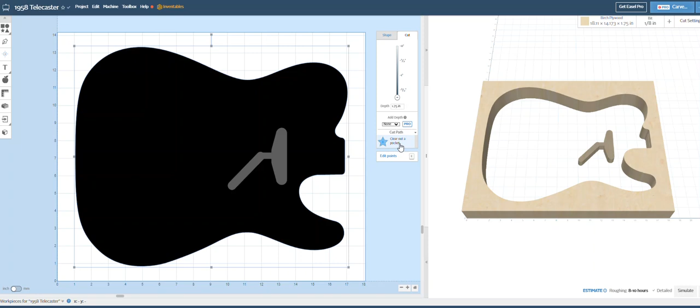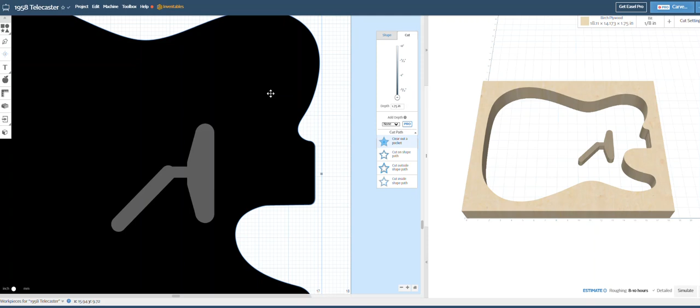So when you have the word cut here, you can see that there's a spot that says cut path, and right now it's on clear out pocket. So if you were to click this, there's a few different options to choose from, right? You have clear out pocket, which is going to clear out everything in between, right? You can see that's why this render over here shows the guitar body completely missing.

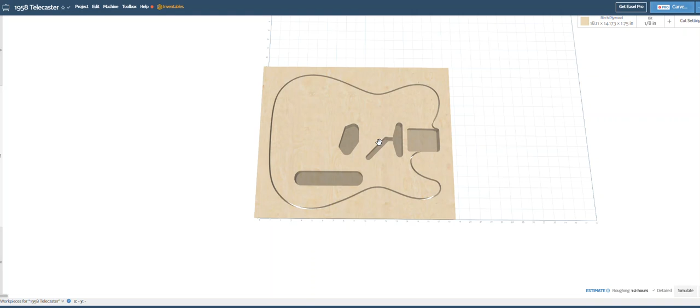Then there's cut on shape. So we're going to take a couple minutes here to talk about this cut on shape. So when I first cut this guitar body years ago, I did not pay attention when I went to cut it out, and I actually told it to cut out on the shape. Now, at the time, I was using a 1/4 inch bit.

So I want you to focus on this real quick so you can see that this looks okay, right? So to the eye, it looks normal. But what is actually happening here is when you tell it to cut on shape, the line that the shape of the guitar body is on will actually be right at the middle of the 1/4 inch bit. So that means that you're going to cut inward about an 1/8 inch and on the outer edge about an 1/8 inch, right? So there'll be a 1/4 inch groove that goes around.

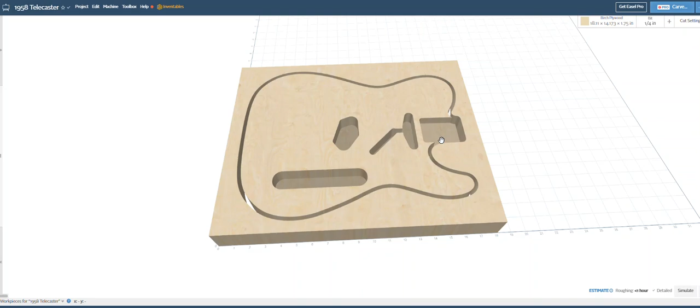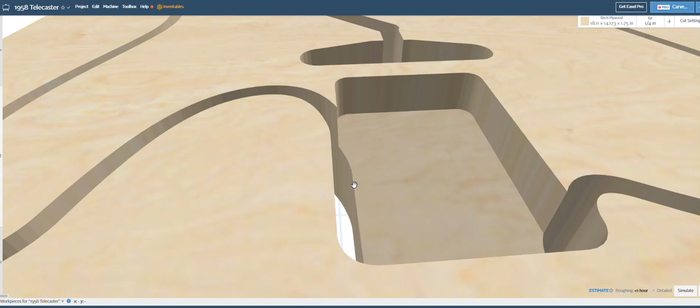But what you end up having, if we look at this pocket of the neck here, is an 1/8 of an inch inward. So when your neck comes in here, your neck's going to fit into here perfectly, right in this spot. But when you get to the cutout spot, so from here around to here, it's going to be wrong by an 1/8 of an inch. So your neck will hang over this edge an 1/8 of an inch. Still usable, but it's not going to be smooth to the finger.

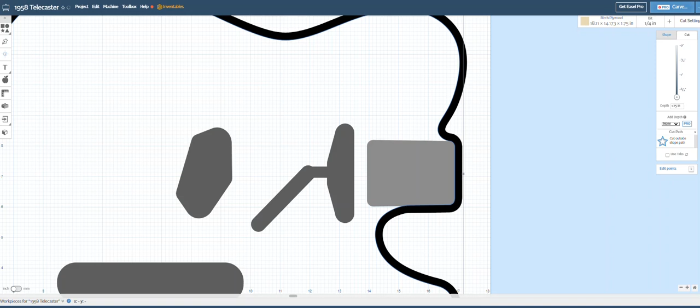So if we go back to this cut option and change it to cut outside of path, you'll notice this line right here is going to shift a little bit. See how that shifted? I'll do that again. We were on cut on shape. We're going to change it to cut outside of path. Let me see if I can get this dual screen for you here.

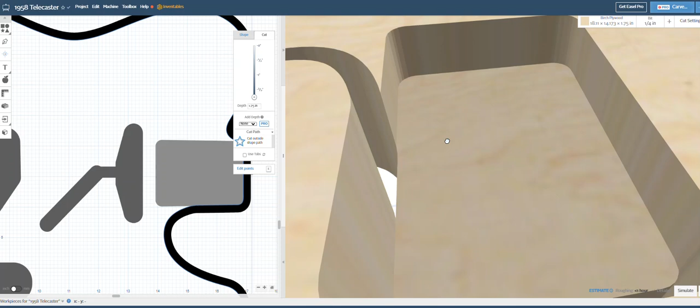So we're going to go back to where it was, and we're going to look real close at this area right here. If we change this to cut outside of path, see how it's nice and smooth to this area here? That is what you want to happen, okay? So cut outside of the shape path when you're cutting something out.

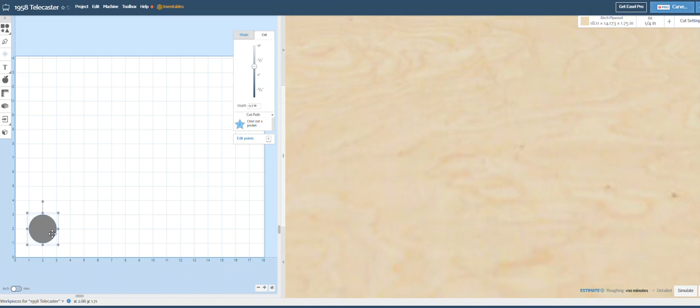So if you wanted to cut out a 15-inch circle, right? I'll just open up another screen here. If we were going to make a circle that was, I guess we'll just say it's 12 inches around, okay? If you were to use a 1/4 inch bit and tell it to cut on shape, you're going to end up with a circle that is like 11 and 7/8 and not 12 inches.

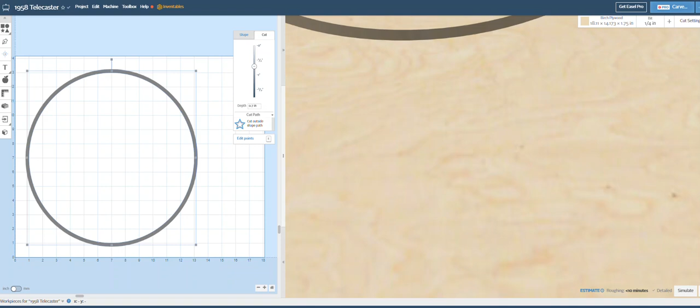But if you were to cut it on outside of the shape path, you would end up with a circle that is exactly the diameter you asked for, 12 inches. So on this guitar piece, I wanted to use this because, if you were cutting a circle out, you could probably use scrap wood. But when you're cutting a guitar body out of a piece of wood that is almost 2 inches thick, it's pretty crucial.

If you make that mistake, you end up with a guitar body that's probably just going to be burnt, turned into scrap, or you may keep it for memory. So, very important. Cut outside shape path will keep you at the exact size you wanted it to be. All right. Your other option is cut inside, which obviously, see how much we get there, right? With a 1/4 inch, we end up a 1/4 inch off, which is huge, right?

So the guitar body I cut years ago is still in my shop, still has a neck in it. It's fully completed. There's just a slight little overhang of the neck right in this area here, but that's pretty important because your hand could be down there, right? So don't make that mistake. Again, if you're new, cut outside of the shape path is the puzzle piece that you want to use, and that will make your spot cut exactly the way you'd like it to be. All right, quick video, quick tip.